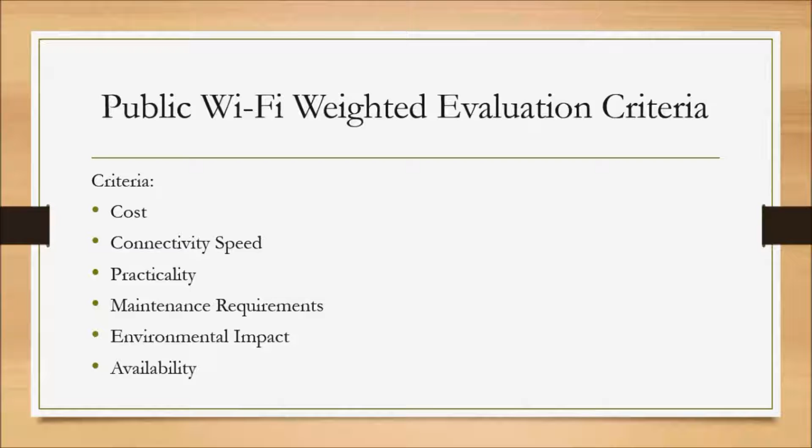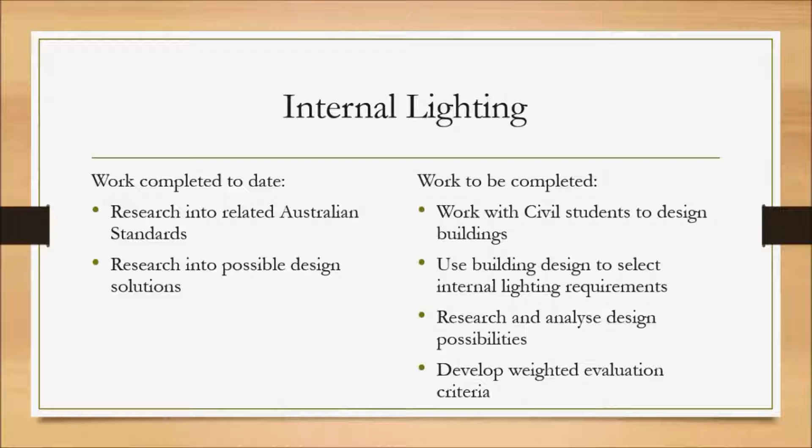I've begun to research into Australian standards that relate to internal lighting, as well as different lights available on the market. I cannot complete any further work until the building designs are complete. Once the buildings have been designed, I can use the dimensions to determine the required lux and lighting that will be implemented in the final rest area design.

I have done a small amount of research into solar PV systems in theory. I cannot complete any further work on solar PV until I have more research into Australian standards and possible design solutions, and have also determined the total power required by the rest area. Once all of this work has been completed, I can develop a weighted evaluation criteria and choose a final design solution for implementation.

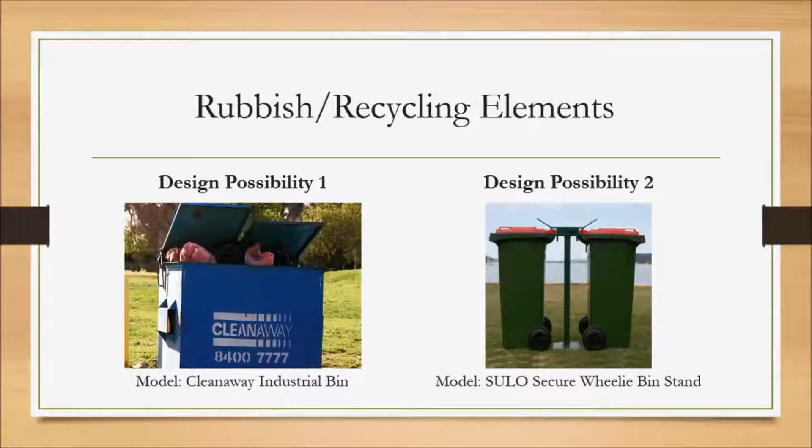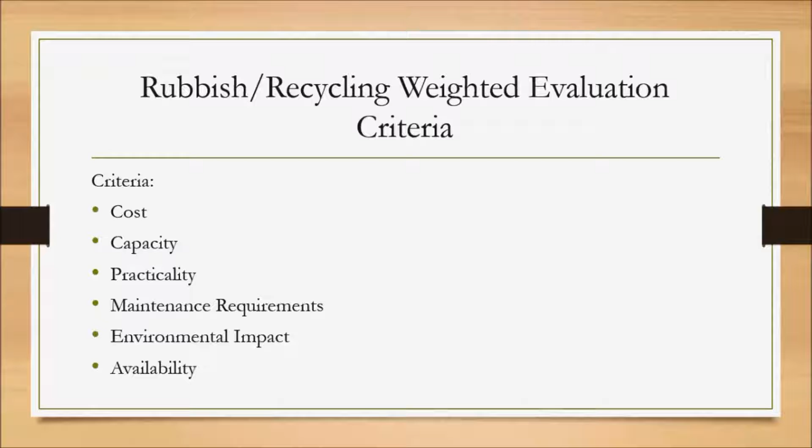I've begun research into public rubbish and recycling design possibilities. After several weeks of research into related theory and different designs available, the two design possibilities I have chosen to analyze and compare are the Cleanaway industrial bin and SULO secure wheelie bin stand. The criteria used to analyze these two possible design solutions are cost, capacity, practicality, maintenance requirements, environmental impact, and availability. The weighting for the criteria will be ranked between 1 and 5 based on their importance, and the design with the highest score will be chosen for implementation.

As you can see from the progress I have made on my assigned work, all the work will be completed by the submission due date.

I have to select the internal lighting design and solar PV system for implementation, as well as complete AutoCAD drawings and work with group members on activities deemed as group work. Finally, I will summarize results for the report submission.

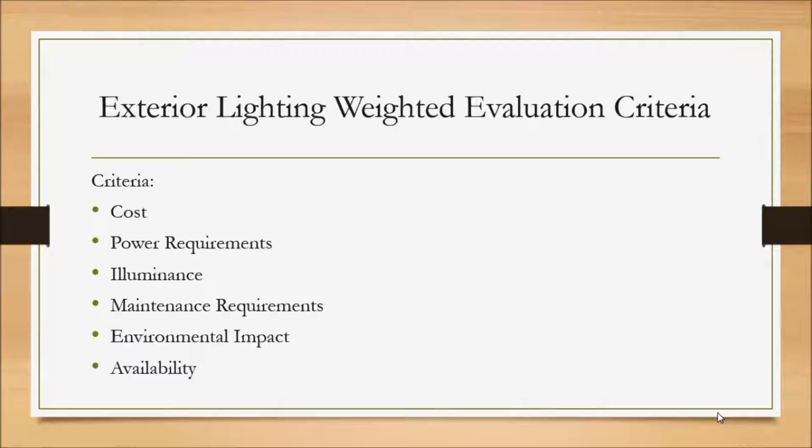In conjunction with Giles and Jackson, the civil group members, I have begun the process of determining the car park layout. There are limited areas where car park lighting can be installed. If the proposed lighting fixtures don't produce sufficient light to certain areas, the plan must be changed. Similarly, if the proposed fixtures inhibit the flow of traffic or available parking spaces, the plan must be revised. So this is an ongoing process.

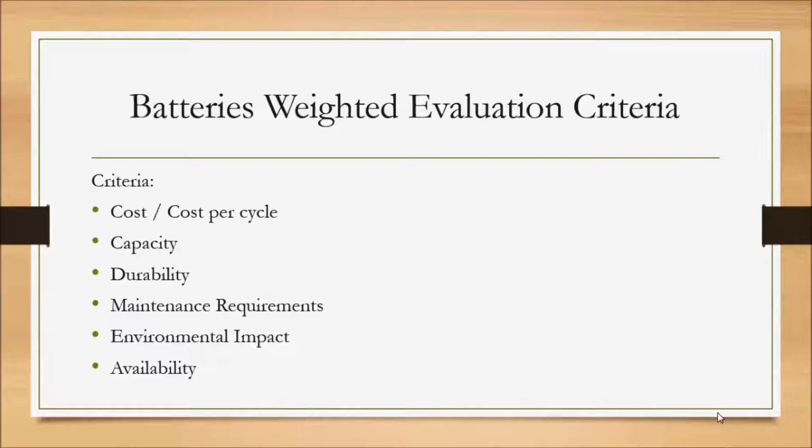Possible battery types have been explored and evaluated. The battery considered most suitable is the valve-regulated lead-acid battery. Design of the electrical storage can't commence until more work is completed on the electrical systems. A more accurate approximation of the average load and power generation is needed to size the battery bank.

For the emergency communication requirements, a payphone will be incorporated, which can be utilized by motorists in the event of an emergency. Research has started on possible additional emergency communication systems.

Work on PET facilities, circuit diagrams and visualizations are yet to commence as per the project plan. As you can see, all work is progressing on schedule according to the project plan and will be completed in time for submission. I will now pass you on to Amos.

Hey, I'm Amos Steele and I've been working as a mechanical engineer student on the RACQ rest area. Within this project, the tasks at hand for me individually involve rainwater collection, water storage and solar hot water for all on-site usages. Thus far, I've been working on sizing the rainwater tank.

There have been many aspects that have affected this task, such as the area on which rainwater will be collected and usage per day. The civil group has recently provided me with the necessary information such as the area created by the roofs, and we have just worked together to decide on the number of facilities in the toilet block. So with this information, it will enable me to make a final conclusion to which size tank will be best suited for the rest area.

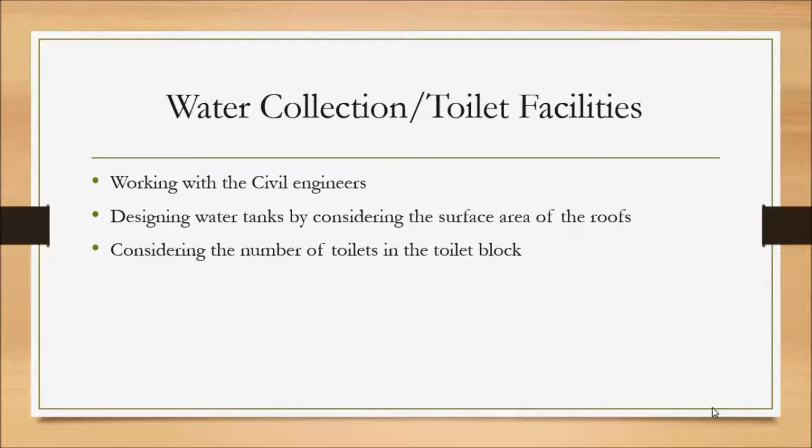So from here on in, I will be focusing on the other mechanical disciplinary aspects and spending my time on the hot water system and sewage options for all the wastewater. I've also been tasked with finding a suitable dump point that will work in the location provided by the civil team. So with all this being said, I will have no problem meeting deadlines with effective solutions. I'll now pass you on to Giles.

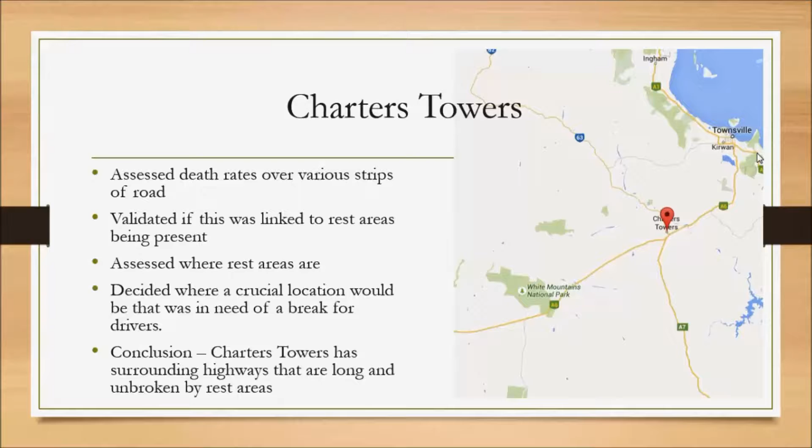Hello, my name is Giles Severe, and I'm a second year civil engineering student, and I will be detailing my parts in the RACQ project. To begin with, the location was taken as Charters Towers. We assessed the death rates and looked at a crucial spot which RACQ needed to have their next rest area.

The capacity, we assessed AADT values for the surrounding strips of road around Charters Towers, and from what we gathered, we needed 8 motorist parking bays and 7 heavy vehicle parking bays.

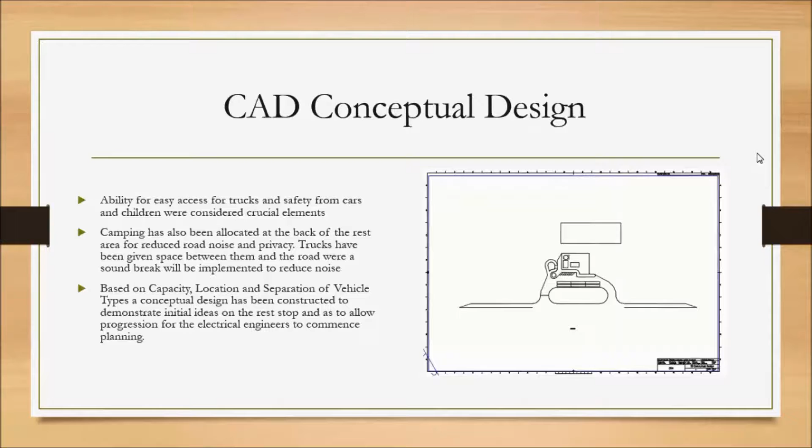Separation of vehicle types and conceptual drawing. This is just the conceptual drawing which we use to implement for the electrical students to have a foundation upon which they do their electrical discipline stuff. As can be seen, we have trucks at the front for ease of access and parking out the back.

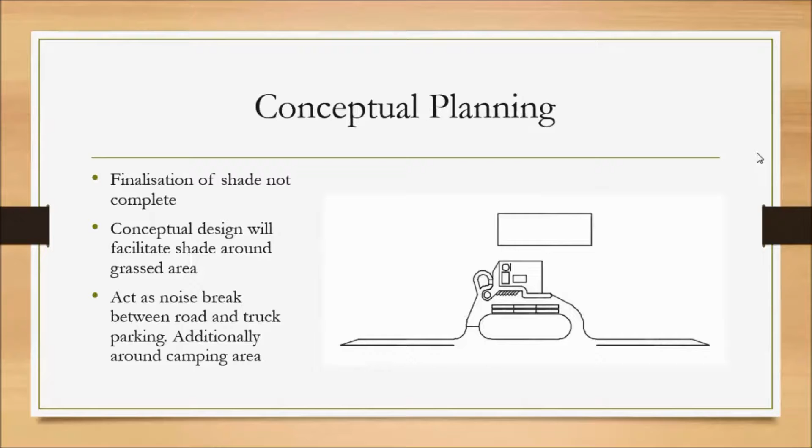Natural shade. Shade isn't completed yet, however there will be shade between the road and truck parking to allow a noise barrier. Shade has also been provided in the grassy area, which will allow for people to have a more pleasant stay. Again, shade will be provided around the camping area at the back and will prevent any noise from disturbing the campers.

Signage. This is still to be conducted, however, initial implementation has already begun. I will now hand you over to Jackson Lorem.

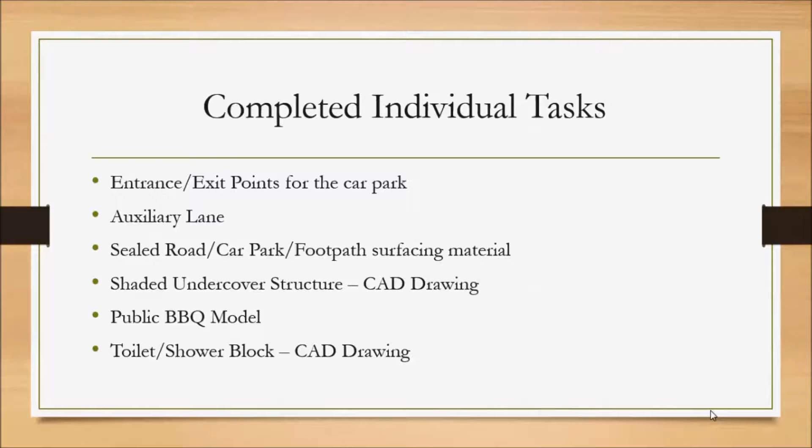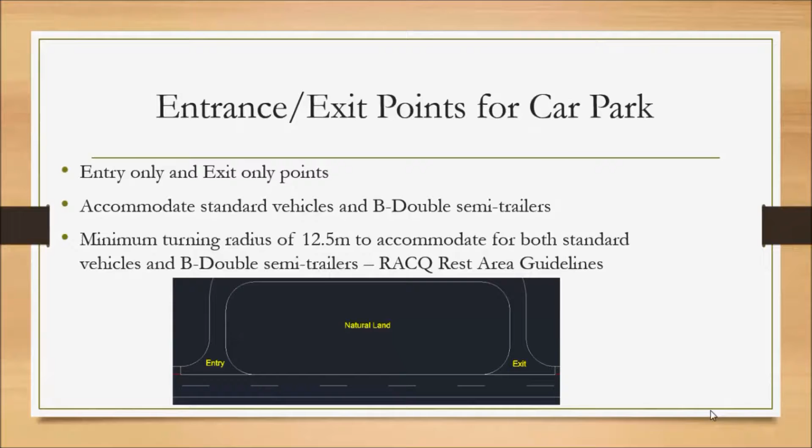So for the entry and exit points, the primary component I had to consider for the actual points themselves was the fact that it had to accommodate both standard vehicles and B-double semi-trailers. And as a safety precaution on a highway, it is mandatory for a particular turn-off to have an auxiliary lane so that drivers can safely turn off the highway without causing any trouble.

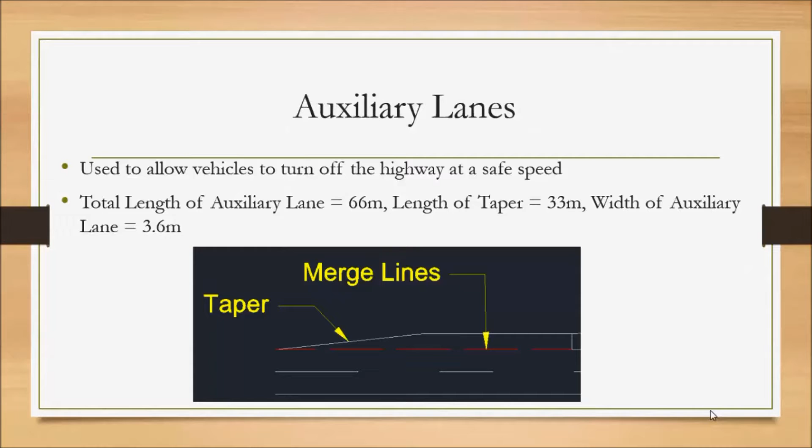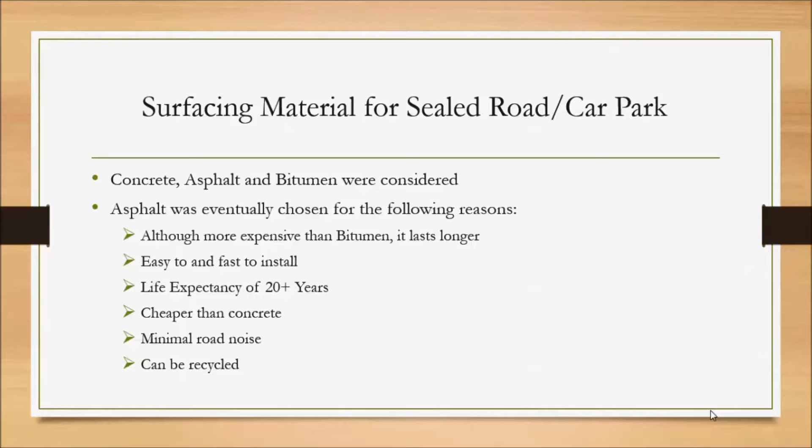For the sealed road and the car park, I considered concrete, asphalt and bitumen. Asphalt was eventually chosen because of its sustainability aspects, which I've listed here. Concrete was chosen as a surfacing material for the footpath, particularly because of its aesthetics.

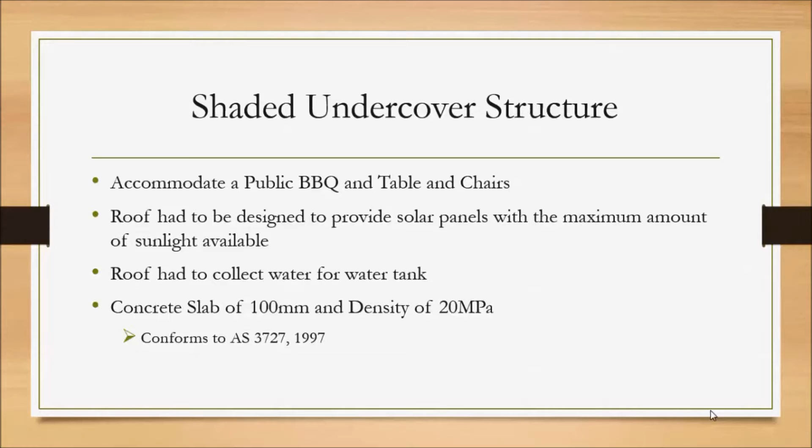The shaded area had 3 important roles: it had to provide shelter for the barbecue area, collect water for the water tank, and accommodate solar panels for the lights in the barbecue. And this is an AutoCAD drawing of the shaded structure, which I designed with the other civil student.

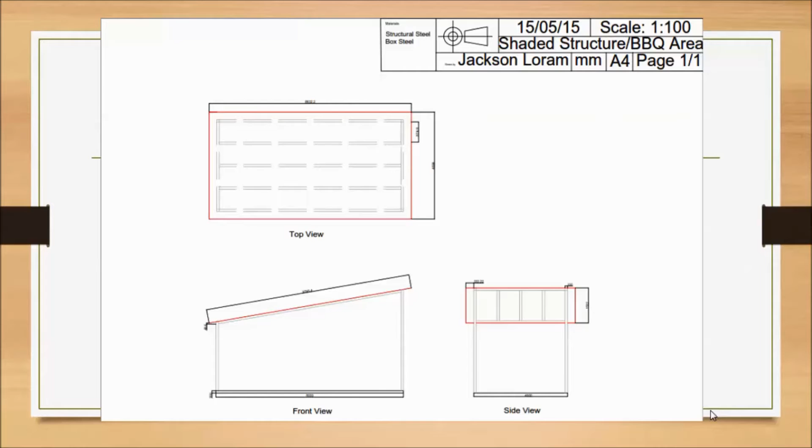And for the public barbecue, I selected the Park Pro Queen size stainless steel plate because of its costing and the fact that it had to be electrically powered.

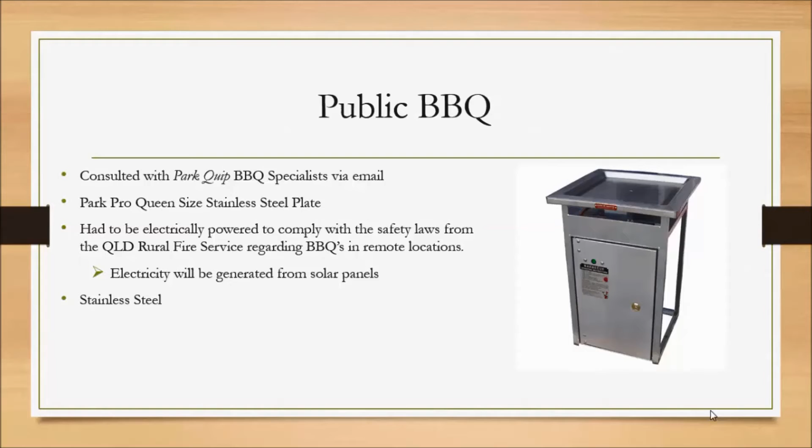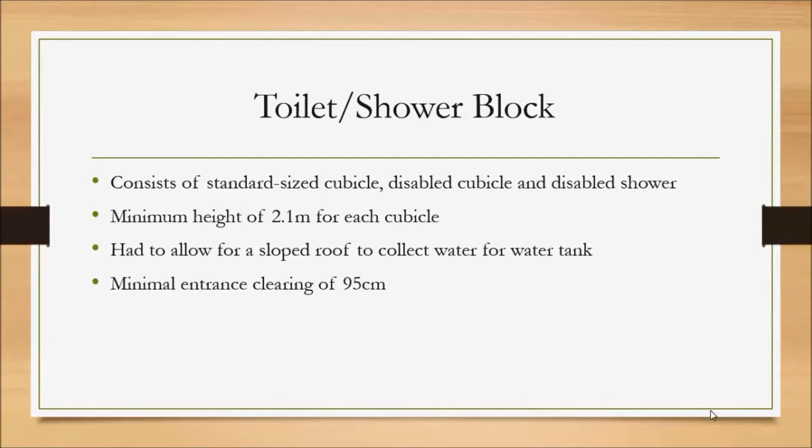And that concludes our presentation. If you have any questions about the project, feel free to contact us, and our proposal will be ready by the submission due date.